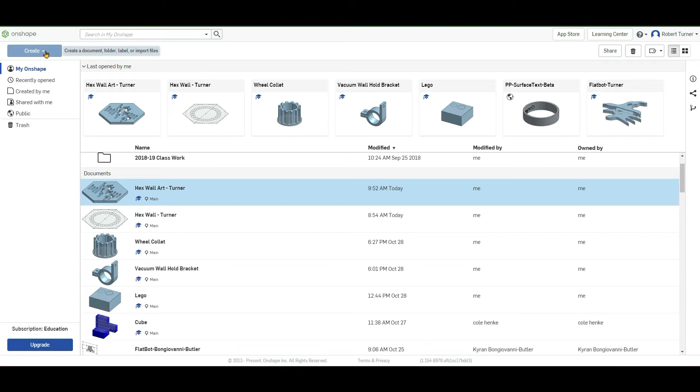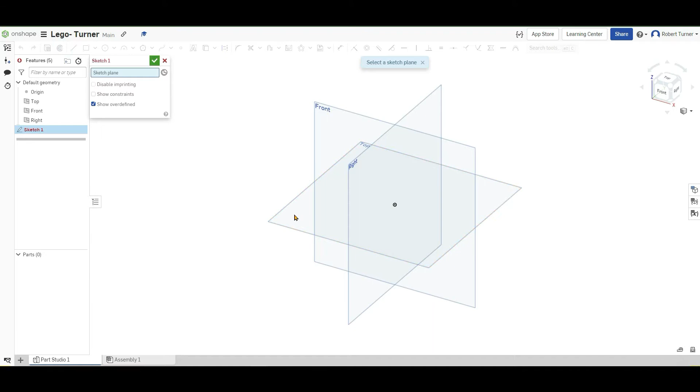Okay, so start out with a sketch that matches your dimensions. Now this is just a demo, the dimensions in here are not the correct size for a Lego, so make sure that you use the measurements that you took. I'm starting out with my basic square, which are the dimensions that I measured.

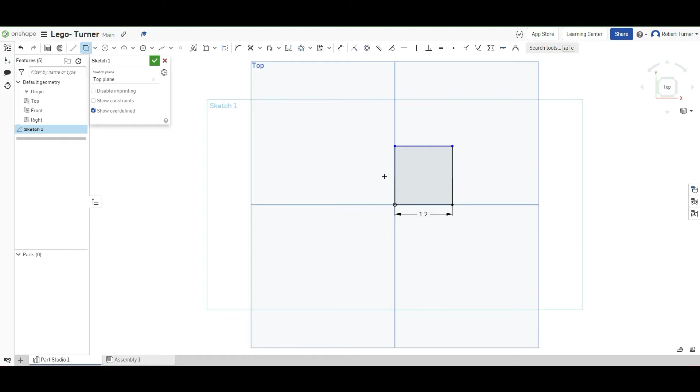Then from there I'm going to extrude that up to the height of my cube, and make sure that you're including the height of the cube plus the little knobs on top of the Lego. So I have my basic cube here.

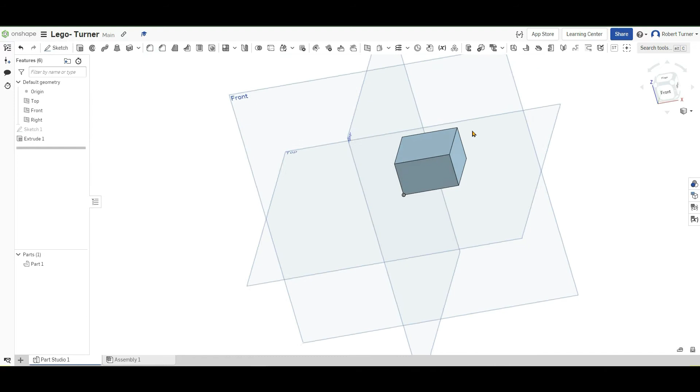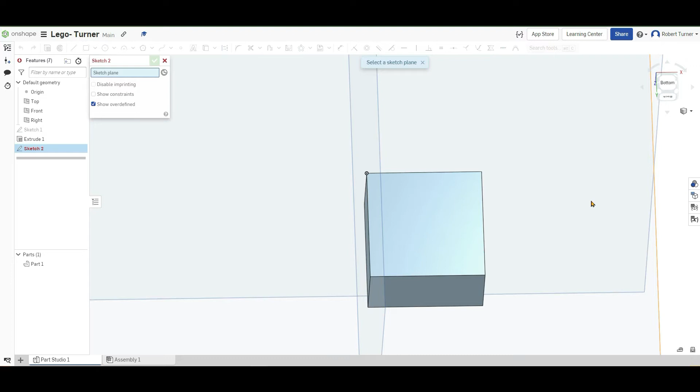I'm going to flip it over to the bottom and draw my square so I can extrude the inside of that cube out, just like it looks on the Lego. So I'm just going to make a sketch, and for my sketch plane, make sure that you select the actual surface of your cube and not one of the sketch planes. If you need to, you can shut the sketch planes off over in the Features tab on the left. Make sure you click on that.

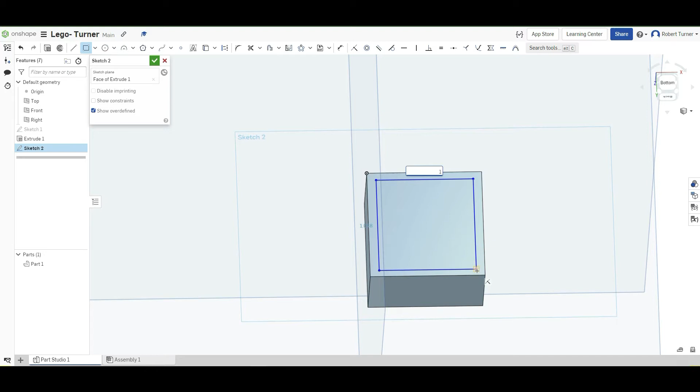Then I'm just going to draw a basic square. It's not going to be perfectly centered, but we're going to go through this process of showing you how to center it. Again, remember my dimensions are not correct, so reference the dimensions that you took with your calipers.

So first thing I'm going to do is find the center of my cube. By dragging over the edge, you can find that midpoint, and follow it until those two yellow dotted lines meet, and that's where you would place your point for your center. Then do the same thing for the square that I just drew.

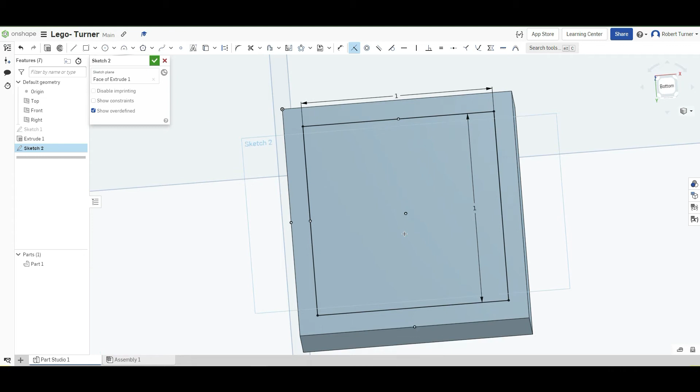Okay, you can see they were close, almost lined up. But to make sure this is centered, you want to click on the coincident tool, click on the center of your square, and then the center of your cube, and it will line it up so that it's coincident.

Then I'm going to extrude out the inside of my Lego. So we're going to click on our newly drawn square and do the remove function. You want to make sure it doesn't go all the way through, and set this to the depth of the inside of the cube that you measured using your calipers.

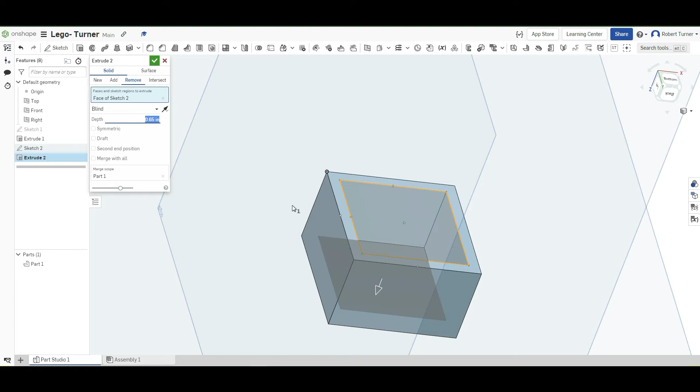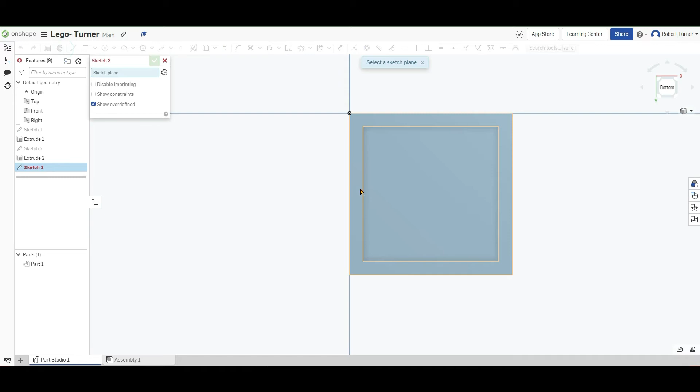Okay, then from this point we're going to draw the circle in the middle of the bottom of our cube. Again, you want to make sure you're clicking on that face on the inside to place your sketch. You can see how that sketch 3 plane goes through the cube at that depth I want to draw at.

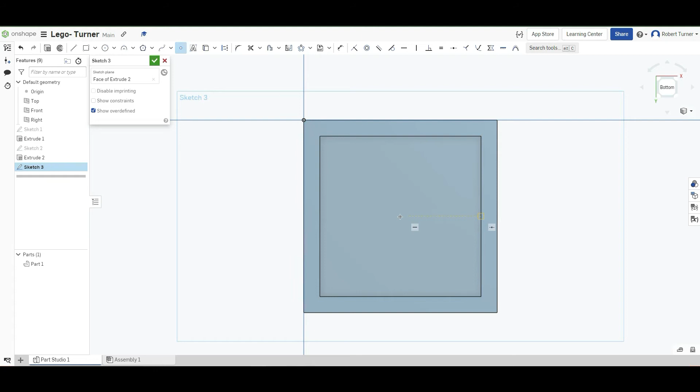Then again I'm going to find the center of my square, because that's where I want to place this circle. Now I have that reference point on center. You're going to click it out, drag it out, and make sure you use two circles here: an inner diameter circle and an outer diameter, so you can actually extrude this tube out from the inside.

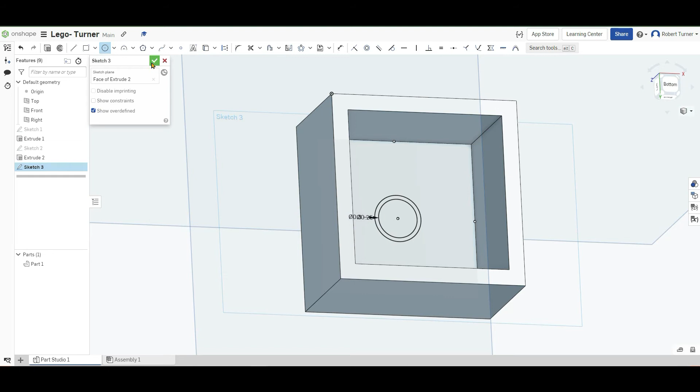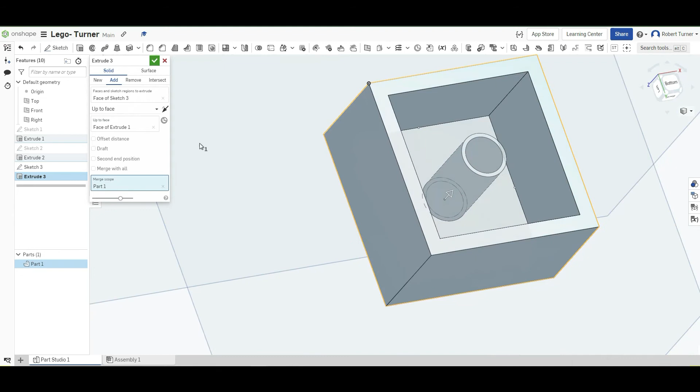Okay, so I'm going to extrude this out. You notice it goes way past. There's an option over here where I can put it right up to the face. So if I click 'up to face' and then click on the very bottom of my Lego, it matches that cylinder up with the bottom of my Lego. Then you want to make sure it's merged with part 1, and then hit your check mark.

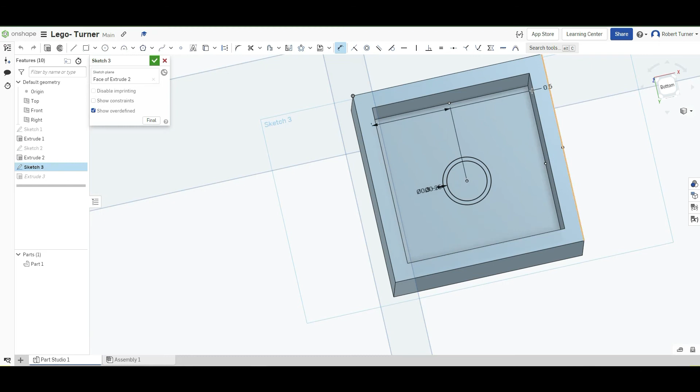Okay, so here I'm just checking the distance from the middle of my circle to the edge to match up the dimensions.

Now you're going to go to the top side and we're going to draw our 4 little peg knobs that are at the top. So to do that, you're going to set one circle, get it to the proper dimension, and then reference that center to the edge.

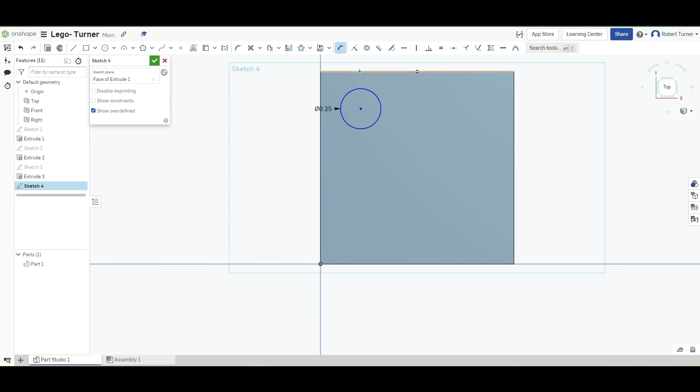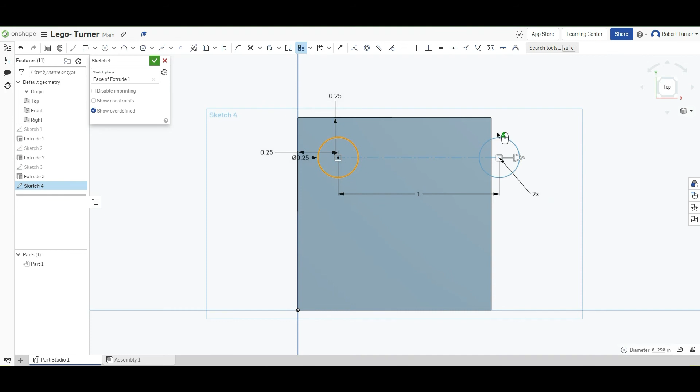Okay, so this is the part where you had to do a little bit of math, taking your measurements to make sure this is located in the correct spot. Then you can draw a linear pattern, or you can draw all 4 of these independently and set them all at the correct dimensions from the edge.

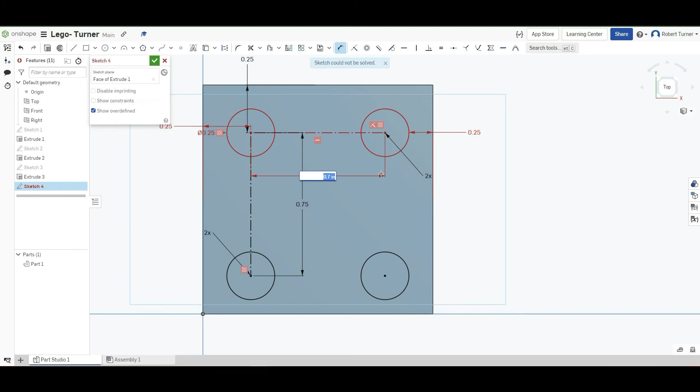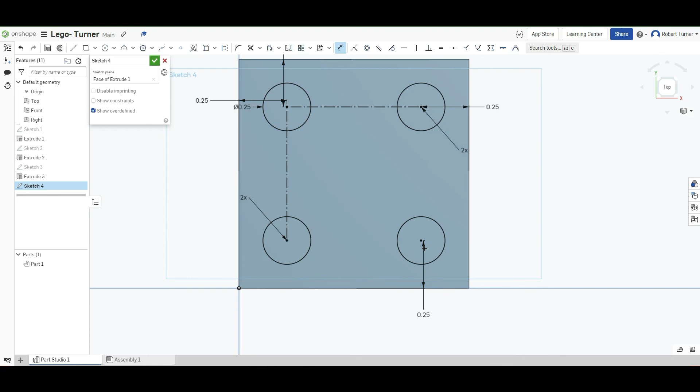But I'm going to do a 2x2 linear pattern tool here. These are kind of the default measurements I did to get it close, but I want to reference that edge, so I get an error. So I'm going to delete these 2 dimensions that came along with the linear pattern, and I'm just going to manually set those dimensions from the middle of my circle to my edge. Now they're all 0.25 from the edge.

Okay, so then I'm done with that sketch, and the last step here is to extrude out those pegs. Make sure you're selecting the pegs and not the extra face there, and then just type in the dimension for your pegs to make sure that's correct.

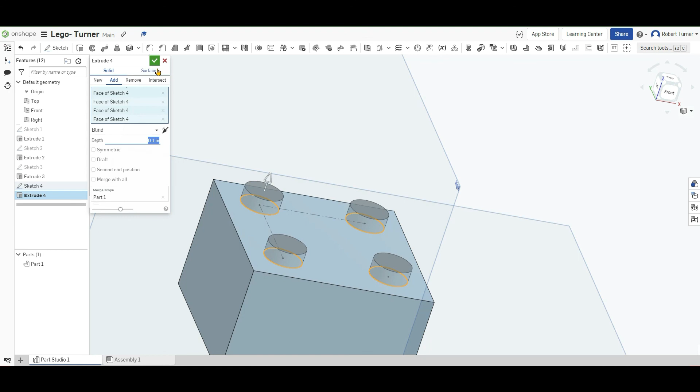Okay, and then look it over. If it doesn't look quite right, then maybe you missed something. But go down here and rename your part to your Lego with your last name. Then you're going to right click and export this part as an STL to send it over to Prusa Slicer and get it ready for the printer.

Okay, and then you're going to take that STL file and go on to the next video.